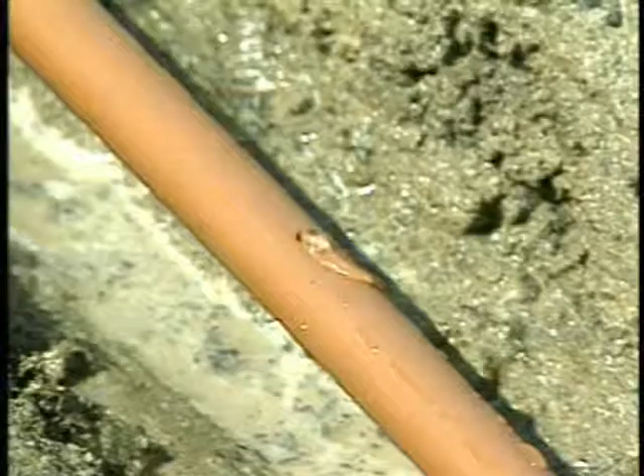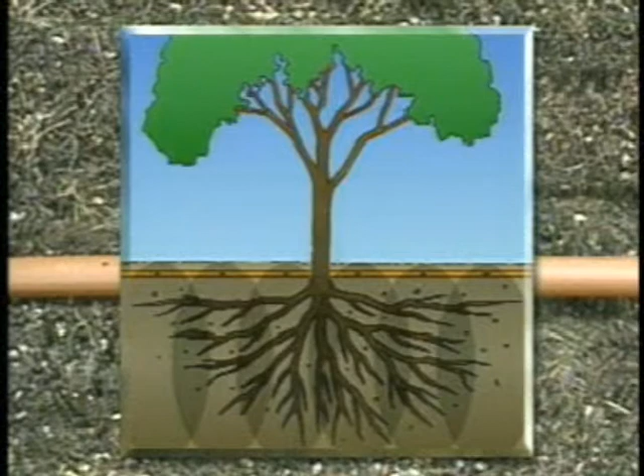A technological breakthrough made subsurface drip irrigation a viable option for landscape applications, including turf areas, for the first time. This amazing innovation, known as TechLine, makes it possible to precisely regulate the flow of water from each self-contained dripper, resulting in even distribution to the entire root zone.

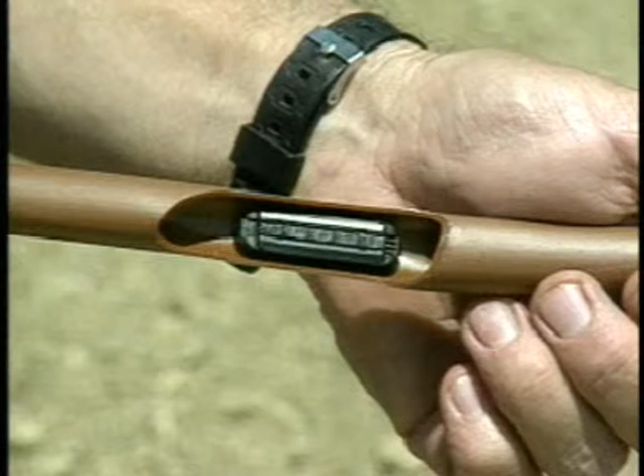Each TechLine dripper is a fully self-contained unit, molded to the interior wall of the dripper tubing, making it a strong, integral part of the tubing itself. The polyethylene tubing and dripper housing, as well as the rubber diaphragm, are made to withstand both chemicals and fertilizers.

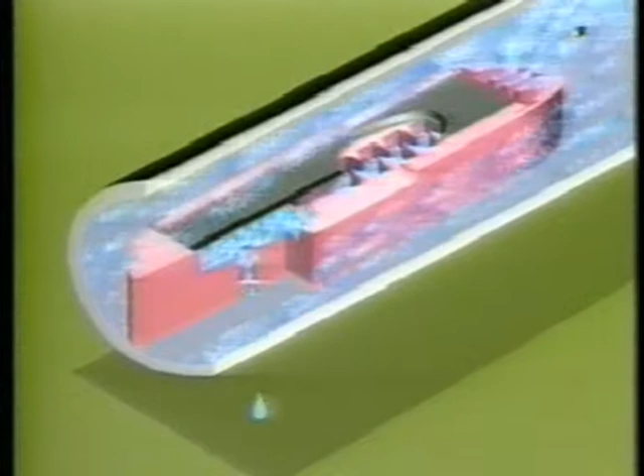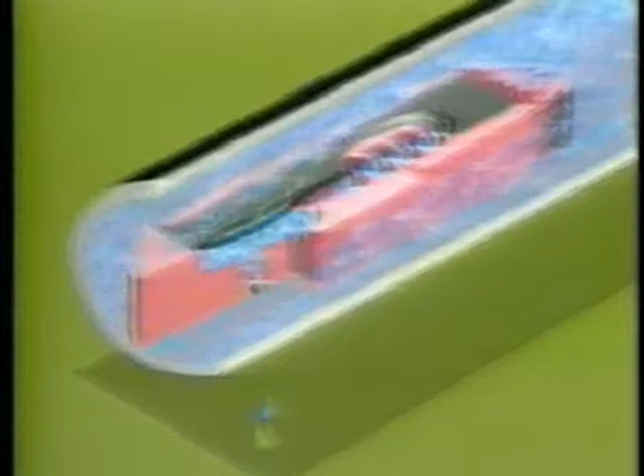Here's how it works. During operation, water flows freely along the center of the tubing, with the velocity of the water washing any large particles and debris downstream. The tiny particles, small enough to enter the filter part of the dripper, pass through the labyrinth and create back pressure, pushing back the diaphragm and initiating the flush cycle.

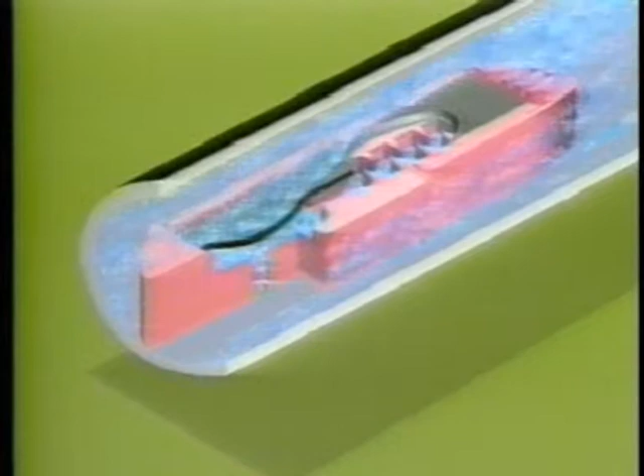The diaphragm then flexes, and any particles that have collected are washed out of the regulating chamber. After flushing, TechLine automatically resumes its regulating mode. This cycle continues as necessary throughout the time the system is in operation. Netafim's TechLine is the only dripper on the market today that self-cleans during operation. Designing with TechLine is easy.

One thing that I like about the Netafim is that you can fit it into areas that have radiuses or tighter areas. By running just a single line down a tight area, you're still going to get the coverage that you require for the plants to grow properly. I'm really surprised how well the landscape has grown in the short amount of time that it's been here, approximately 6 to 8 months.

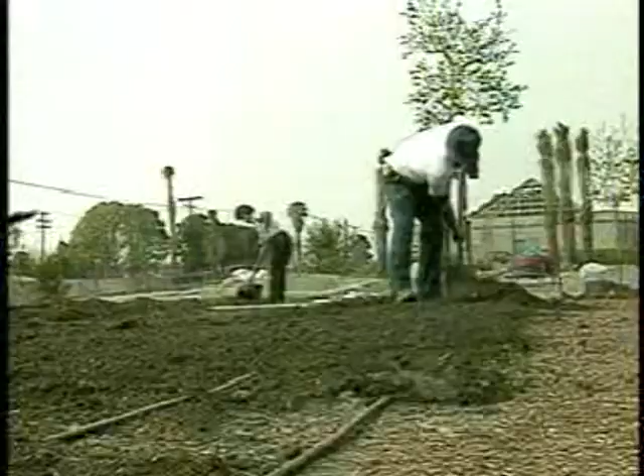TechLine can be installed by trenching, by laying it out on a subgrade 4 inches lower than the finished grade and backfilling, by using a vibratory plow or insertion shank, or by using the metal TechLine soil staples to hold it in place on the surface and covering it with mulch. We found it to be very successful in turf areas and in shrub ground cover applications.

One of the advantages in using the Netafim product is leaving the water under the ground rather than on top of our foliage, especially in areas in which the water would damage our foliage. We found that we can get very even distribution of water and place water where we want it, whether we have a tree or a shrub line, a hedge line, or in turf areas. It's basically a good water conserving medium to place the water where it needs to be.

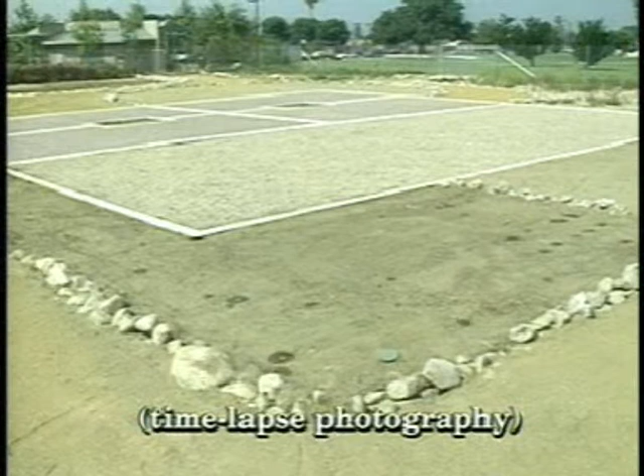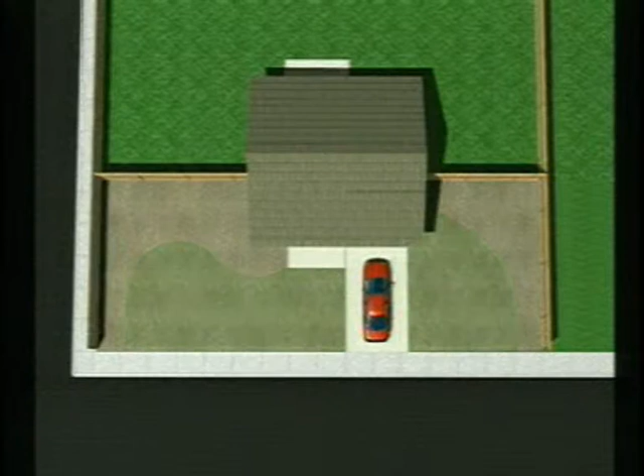Once you see how beautifully healthy the plants stay, you'll realize there's much more happening than meets the eye. For example, after you install a TechLine system and turn it on, this is what you'll see. It doesn't look like a lot of water is being applied, but let's see what's really happening. Here we're looking at a bird's eye view of a typical residential landscape, with a TechLine system installed below it.

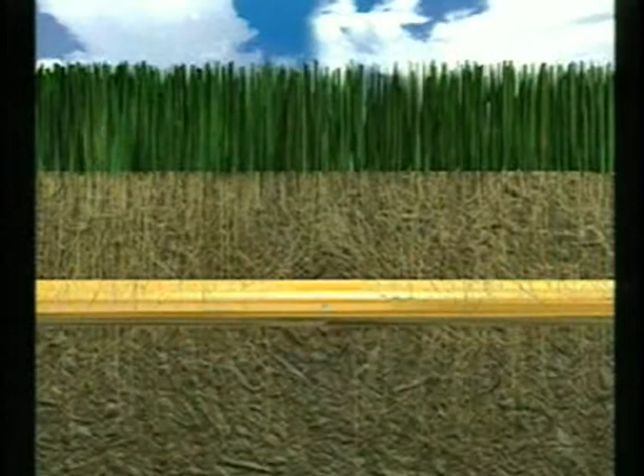Now, as you saw earlier, if you turn the system on after installation, this is the kind of wetting pattern you might see on the surface. In fact, depending upon soil compaction, you might not see any wet areas above some of the drippers. But when you go from a bird's eye view to a worm's eye view, you see an entirely different story.

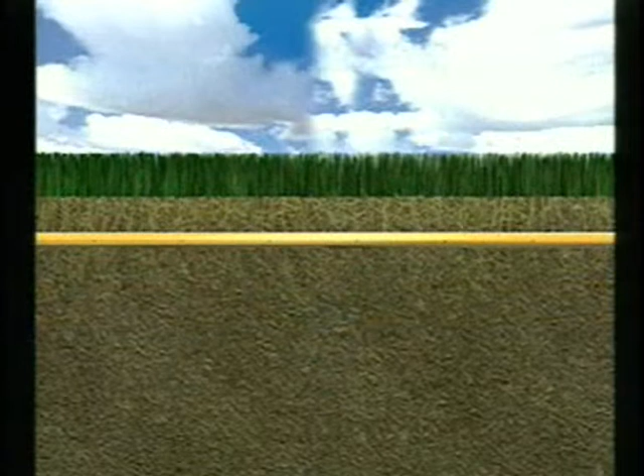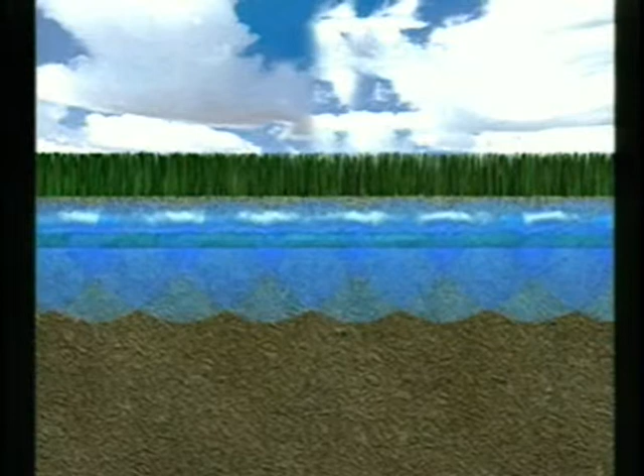As demonstrated here, the slow, measured application of water from a TechLine dripper creates a wetting pattern that expands upward and outward, with the water being drawn, like a sponge, through even the most compact of soils. This water movement between soil particles is called capillary action, and results in a wetting pattern throughout the network that overlaps as many as 3 or 4 drippers to fully cover the plant's root zone.

So you see, what appears on top of the ground does not at all represent what's happening under the surface, where it really counts. Because of the even application of water, you can be confident that the entire zone will receive the right amount of water the plant needs to stay green and healthy, and the irrigation schedule is easily modified to germinate hydroseed, turf grass, or other seeded plantings.

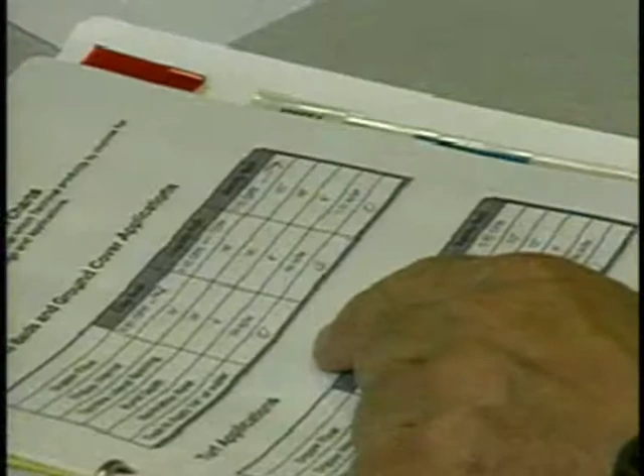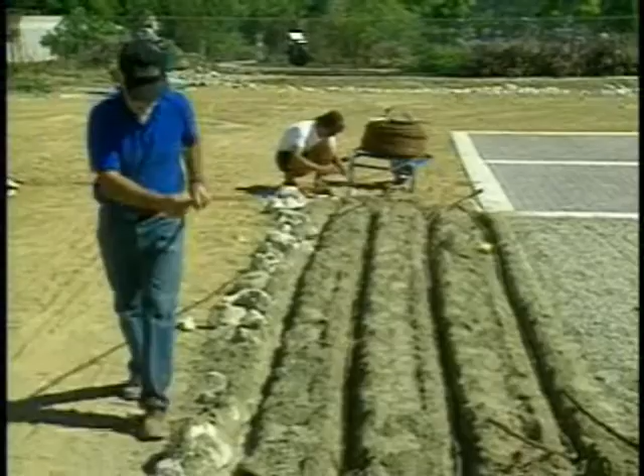It's very easy to design. There's not many calculations involved. Most spray systems won't function to the degree of uniform distribution that you would get out of a TechLine system. It is an ideal use of irrigation in terms of that uniformity. TechLine is easy to design with and very simple to install. TechLine, the irrigation problem solver.